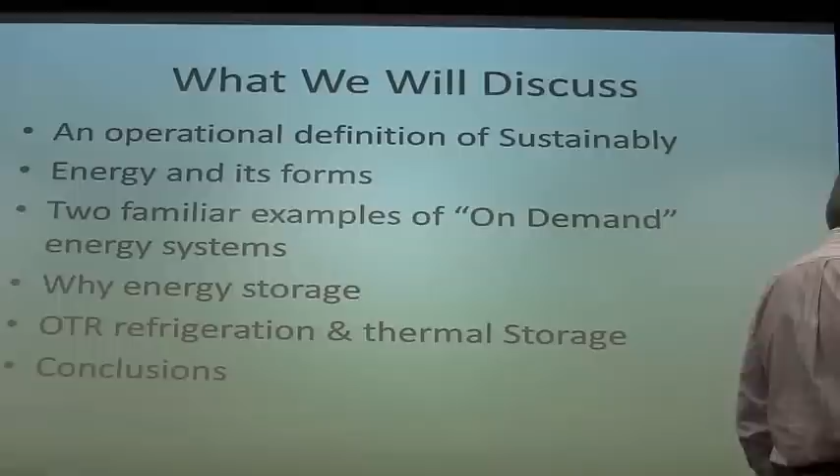I'm not going to go through all the design work, the model work, and all that stuff related to that. Then we'll conclude with a single slide. Is there some magic thing? It'd be nice to - oh there, I figured out how to work it.

Here's the definition of sustainability, and this is not unique to me. If you read books about sustainability, which I do, and I study and research sustainability, it is really the intersection of three things: energy, environment, and economics, represented here by three different colored circles - energy being red, economics green, and blue representing the environment.

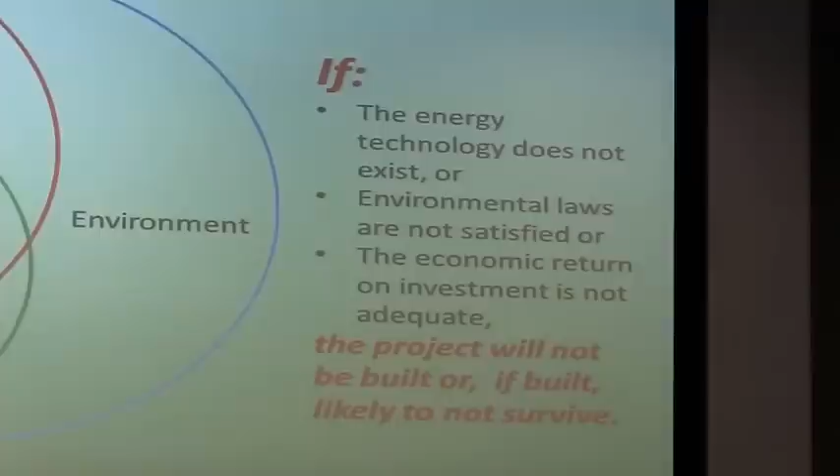Over here on the side, there are some ifs about this. It's sustainable if you have the energy technology - if you don't, you can't build it, so it's clearly not a sustainable solution. It's sustainable if the environmental laws are satisfied. If they're not satisfied, you're not going to be allowed to build it either, so you can't use that solution set. That's important to remember, because it's the laws, and they change along with the technology, that really control what's sustainable.

The last thing is the economics - if the economic return on investment is not adequate, you're not going to be able to attract investors to build the facility and your project. The reality is that if the energy constraints, environmental constraints, and economic constraints are not all met, it's not going to contribute anything to the supply of energy.

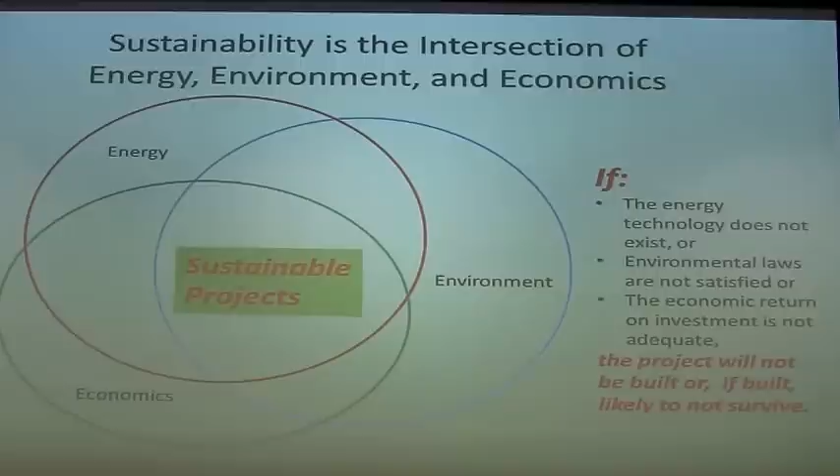So graphically, it's represented by a small subset, and if you're in the design business, you discover just how small that subset is - it's a pretty small subset of all those choices. What's entertaining about the energy business is that subset changes continuously, because the technology of energy, the environmental legal constraints, and the economic return on investment constraints change all the time. So you have to be careful when you do a startup company, to try to project what's going to happen to some of those issues during the startup time.

Alrighty, so this is probably the most boring slide here, but it's a necessary evil, otherwise we're going to have a hard time even discussing the subject with one another.

Energy is the ability of a body or a system to do work. And by that we mean, in essence, lift a weight or cause a weight to be lifted. So if you can convert it to work, you're in good shape.

Heat is the transfer of energy. What's interesting about energy is that this little controller I'm holding has energy stored in it. The only way you can tell there's energy in it is if you transfer energy from it to something else. There are two common ways of transferring that energy. There are lots of mechanisms, but at the end of the day, heat is the transfer of energy from one body to another by virtue of their temperature difference.

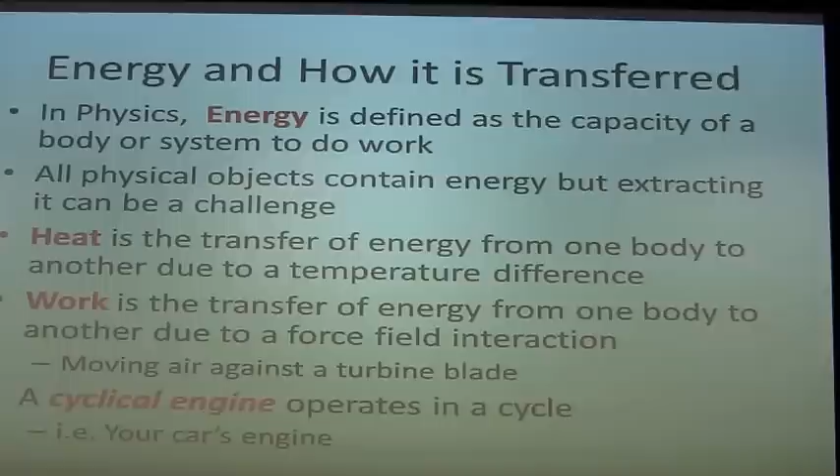Now, if I asked you, is it possible to transfer heat from a high temperature source to a low temperature source, you'd all tell me yes. Is it possible to transfer heat naturally from a low temperature source to a high temperature source? That does not occur naturally, right? We all know that. That, folks, is a very brief statement of the second law of thermodynamics, which, by the way, was discovered before the first law was.

Work is the transfer of energy from one body to another by virtue of a force field interaction. I've given you an example for that because the idea of a force field might be hard to accept. So if you've got moving air against a turbine blade, like on top of a windmill or a wind turbine, the air's interaction with the blade is a force field, a pressure field against the blade. It actually turns the blade. It's an imparting, a change of energy in the airstream, and it gets imparted to the turbine blade.

A cyclical engine is the last piece of this definition puzzle I have to cover with you, and so it operates in a cycle. An engine is a device that takes heat, converts it into work, and does so in a cycle, meaning the cycle repeats in time. A good example is your automotive engine, where the piston goes up and down, and depending on whether it's a diesel or a regular Otto cycle internal combustion engine, it might go up and down twice. But it repeats, it goes through a cycle, set point in time. Those four words are extremely important to you.

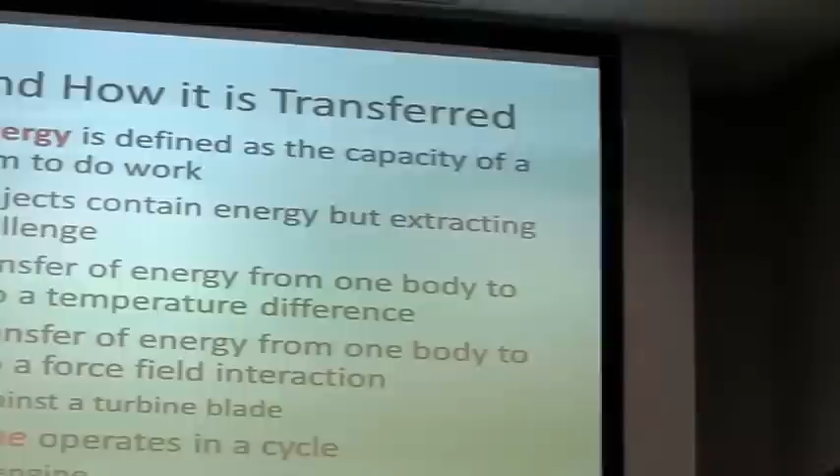All right, so let's see here. Now I had to define those in order to do this slide, so this is the second boring slide. All cyclical systems producing work, biological and man-made, share the following.

They all buy and consume energy. Somehow they get their food and their fuel. A tree is a cyclical engine, sometimes with a very long half-life, but nonetheless. Clearly, your automobile is a cyclical engine, and clearly when you run your automobile, you're the consumer. You buy the energy, you put it into it, and you get the work out of it.

They produce work when demanded by the system they serve. So when you demand more energy out of your car and you push down the gas pedal, you provide it more fuel and it produces more work, it goes faster. They also produce waste heat. That's what the radiator is on the front of your car, it gets rid of the waste heat. The system efficiency is defined as the work produced by the cyclical engine divided by what you paid for, e.g. the cost of the fuel coming into it.

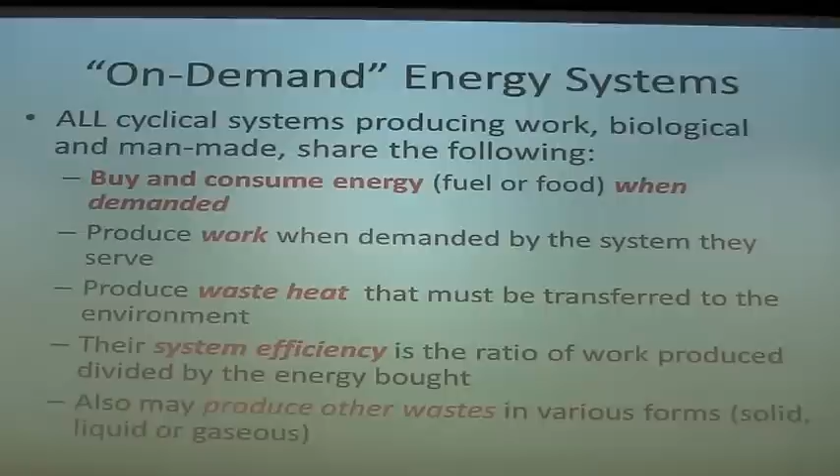They also produce other wastes: gaseous, liquid, and solid. They can produce one or more of those forms, or all of them. It's one of the interesting things about this, you'll notice it is impossible, according to the second law of thermodynamics, for all of the fuel you put in to be converted entirely to work. You always have to produce waste heat.

Now you say, that's interesting. So let's bring it a little closer to home. I want us to analyze what happens to Susie and Ahmed, two human beings. Is this close enough to home for us? Their bodies are cyclical chemical engines.

Our bodies are cyclical chemical engines, and we operate at 98.6 degrees Fahrenheit. The human body is a fascinating cyclical chemical engine with all sorts of interesting protection mechanisms built in, one of them being that we protect this 98.6 Fahrenheit a lot. The body's mechanisms for doing that are substantial.

Intake: every day we get up and eat our bowl of Cheerios or whatever, have lunch and dinner, or in some cases two meals, some places three, other people eat every other hour, who knows. We eat on demand, we eat when we are hungry. We demand that food be there, and if we get hungry enough, we become very demanding about it. So we count on a whole bunch of systems to provide us that food every day.

Even though food doesn't deliver much energy per buck, as you know from your cheat sheet, your body counts on that, and you are an on-demand energy system. We all do mechanical work — it took effort to walk up the stairs today, to carry your book bag or briefcase around. That's mechanical work, and we all do it every day.

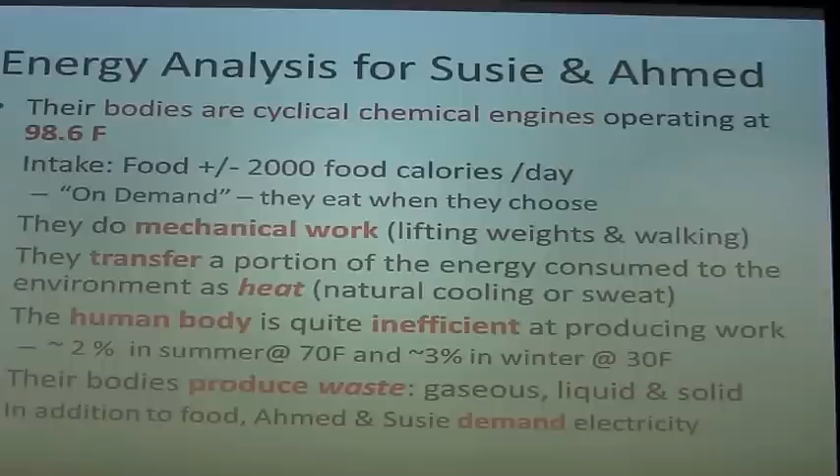In addition to food, however, we all demand electricity. How upset do we all get when there's a blackout? We've all experienced various and sundry kinds of blackouts, some minor, some not so minor.

Excuse me, I have a question. How do you calculate the 2% efficiency?

It's the thermodynamic Carnot temperature ratio — the high temperature, the body's temperature, minus the environmental temperature, divided by the body temperature in absolute temperature. So it's pretty low. And now that you've asked that question, that was a setup: the closer the body temperature is to the environmental temperature, the less work you can get out of the energy source.

So while the amount of solar energy falling on the face of the Earth is several hundred times — about 200 times — more than what humankind consumes, the problem is it's falling on the surface of the Earth at or close to the environmental temperature, so the amount of work you can get out of it is very small. So it was sort of a setup. Thanks, Narayan, for asking the question.

This is a photograph of a typical power plant. I randomly chose this from the web — you can find all sorts of photographs, but this one turns out to be pretty good from a lot of perspectives. First of all, when you see these, a lot of people driving down the road will see cooling towers, and that's what these are. They'll say, oh, it's a nuclear plant — well, not true. It's just a way of removing the waste heat from that power plant. That power plant can be a gas plant, a coal plant, a nuclear plant, or actually a solar thermal plant.

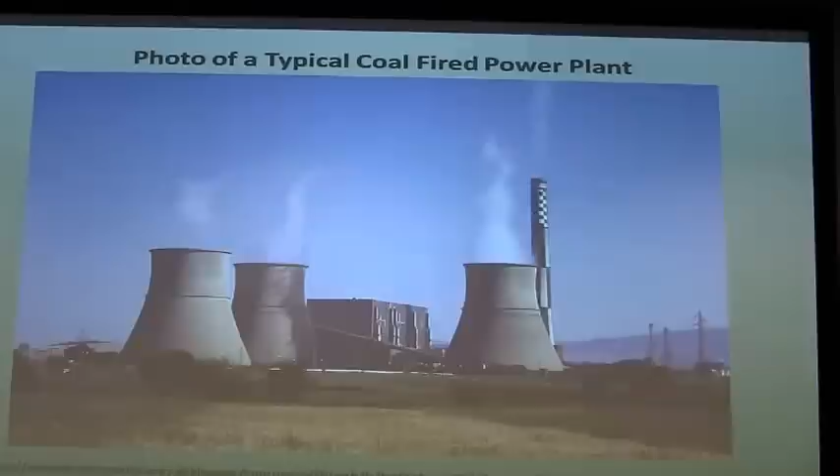You can tell it's a coal plant because of the transportation mechanism, a belt that connects the coal pile to the boiler, located in these big block boxes. The boxes are actually built around the boilers themselves—portions of them are the outside of the physical boiler. The coal is provided to those boilers through that mechanism. You can tell those are the boilers because these are the steam lines coming off of them. So if you know anything about power plants, you say, aha, that's a typical coal-fired power plant.

Now what I'm going to do is compare a power plant to Ahmed and Susie. A power plant is a cyclical chemical engine, much like Susie and Ahmed. The difference is they operate between 800 degrees Fahrenheit and 1500 Fahrenheit—they don't operate at 98.6. They operate a long way from the environmental temperature, long enough that seasonal variations in environmental temperature have little impact on their efficiency. It has a minor effect, but it's very small.

Their intake is a fuel, and the fuel can be, if it's a conventional power plant, gas, natural gas, coal, or nuclear, or coal and natural gas, because they're running two different cycles within the plant—that's called a combined cycle plant, which you'll see in a little bit.

They do mechanical work. The mechanical work they do is turn the shaft of the generator that generates the electricity that comes out of this wall. How it gets there, you're going to see that too in a second. But at the end of the day, they turn a mechanical shaft that turns the generator and makes the electricity.

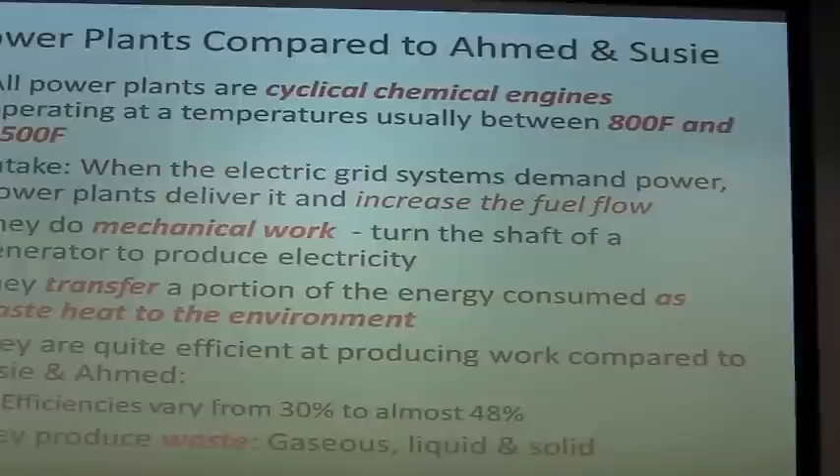Oops, I don't have to go up there. I had a quick question. Because of the high temperatures that they operate on, the weather patterns don't make a difference?

That's right. Whether the environmental temperature is 90 degrees Fahrenheit outside or 20 below, that would change the efficiency of the plant a little bit, because you can't freeze the water, so they have to keep it above like 50 degrees Fahrenheit as the low temperature. But the temperature at the bottom doesn't change much—it might go from 50 to 70, and that's about all. So in terms of changing efficiency, it really has a minor impact. What does control it is the high temperature, which is a materials problem. The only reason we can't make more efficient power plants is because of the material science involved in making particularly the turbines.

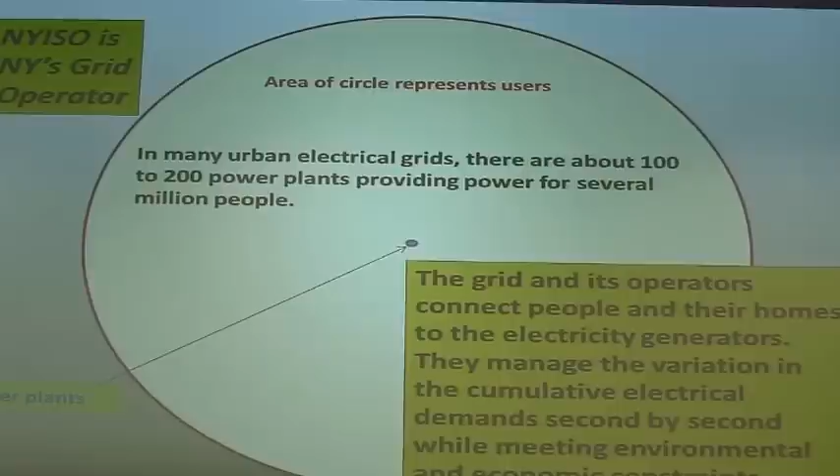Now I want to talk to you. We've got the power generator—we're at the aft end of the generator, and the plant is producing power. The power plant has to connect to you and me and our homes and computers, so it has to come out of that wall socket. In order to do that, there is a vast network of wires in the country that connect the small number of power plants to the millions of users.

The country is broken up into sections. Sometimes they're along state lines; other times some states have multiple grids within them. You're going to see both examples here. The first is New York State, which has one grid operator called NYISO. They are responsible for controlling and taking all the energy sources from the few power plants we have and distributing it to however many people live here—15 or 18 million people in New York. I don't know the current population.

So what I tried to do here is give you some sense of that. We have something like 100 to 200 power plants, and typically the area of this circle represents tens of millions of people—typically 10 to 20 million. So you're connecting a few hundred points with 20 million users, all of whom are Susie and Ahmed, all of whom have the right to turn the switch on or off, plug in their computer, start the hair dryer, turn on the washing machine, turn on the electric stove, whatever. They do that entirely at their will. All 15 million of those people in the grid are on-demand customers not controlled by anybody.

How complex is it? Now I've switched gears, I've gone from New York State to Texas with this chart. The reason I'm using Texas is that the strategies for reduction of CO2 production in the state have changed dramatically. In New York, what we're doing is shutting off the gas-powered plants in New York City, which are the lowest polluters by the way, and drawing on our assets in the nuclear plants, which have no CO2 production, and the St. Lawrence Seaway hydro plants, which are also no CO2.

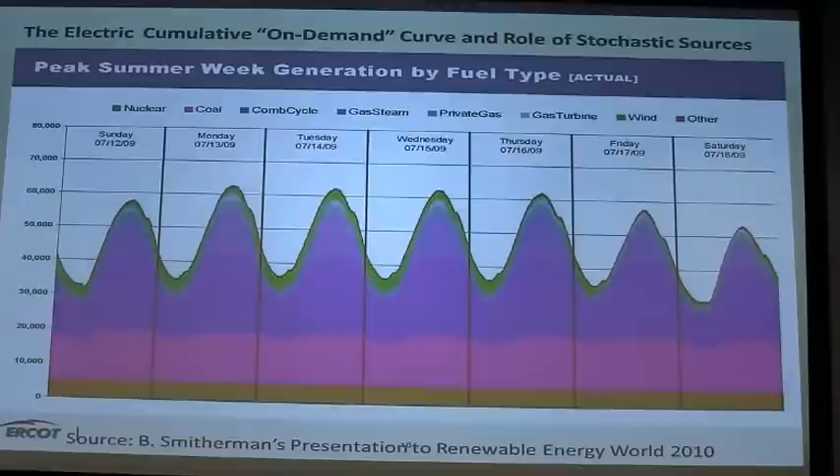Got it? But in order to do that, what do they have to have? A way of getting the power from the St. Lawrence Seaway and the nuke plants to New York City. So their power curve and our power curve look the same. This is what the diurnal power curve looks like in a typical grid. It starts out here, this line is midnight, so each line represents midnight between the two days, and you go from the early morning onward.

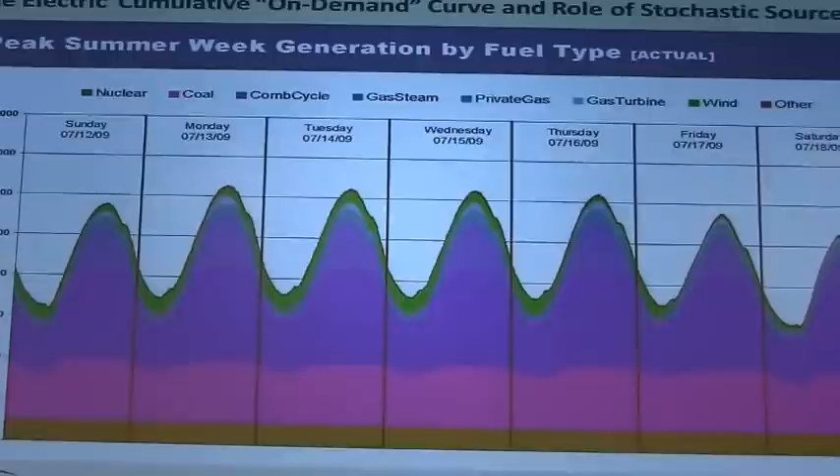Everybody starts getting up, they turn on their toasters and make breakfast, and they go about their day. They get to the office, they start up their plants, we start up the manufacturing plants that use electricity — all the things we do to make a living and to have our country be an economic success use electricity, which by the way is about a quarter of the total energy use of the country. But what's important about that statement is it's pure work.

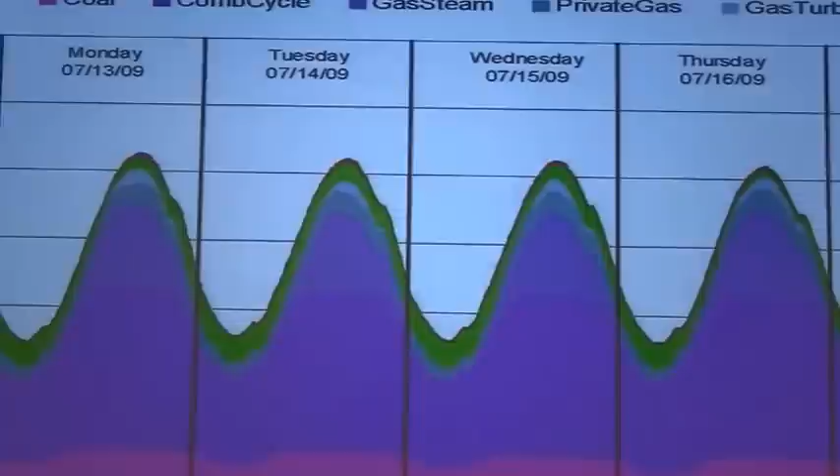Then it reaches a peak here at the end of the day, you know, you come home, and this peak is also caused by the air conditioning load, especially when you're in Texas. Well, actually even here. You'll notice this is actual data from July 12th, 2009. Then what happens is the air conditioning load goes down, the plants tend to shut down, at least some of them do. The companies close down and people come home and go to bed and go to sleep, and the cycle sort of repeats. So that's how the global cycle happens.

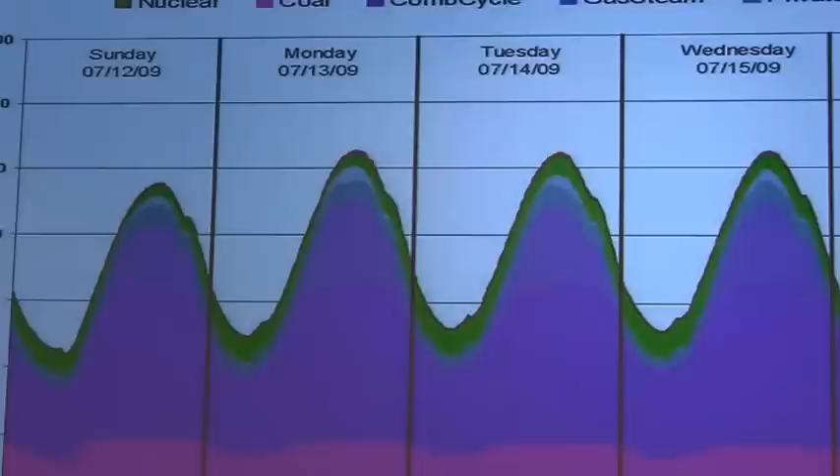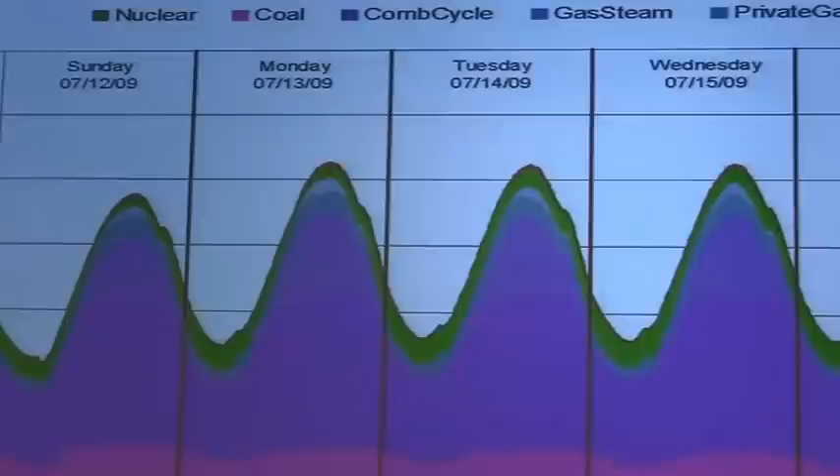Now, what's interesting about this slide is they have shown you how they get the power, what fuel sector the power came from. The fuel sectors covered are nuclear, coal, combined cycle - that's where you have a combined coal plant and a gas plant - gas steam plant, which is just a regular power plant run by gas, private gas and gas turbines. These two over here are actually gas turbine plants. And then wind and other.

The other in this particular case is solar photovoltaic and geothermal. Geothermal is different than the others because geothermal is an on-demand power plant, just like nuclear, coal, combined cycle, gas steam, private gas, and gas turbine are.

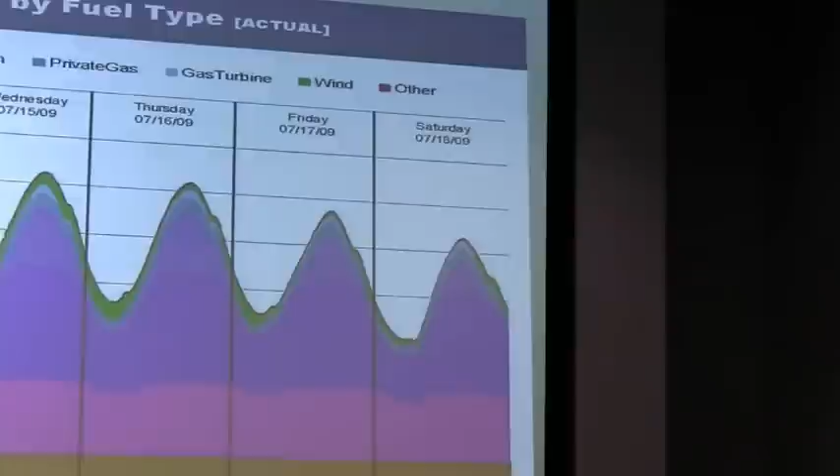The solar photovoltaic issue is that the energy storage required to meet the power demand from a stochastic source doesn't exist. We don't have good commercial scale energy storage. This graph shows you how much you need of that to do that, which is substantial.

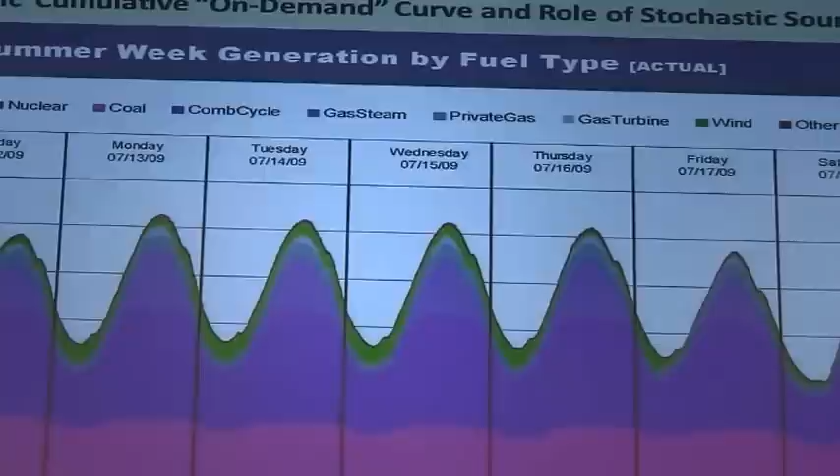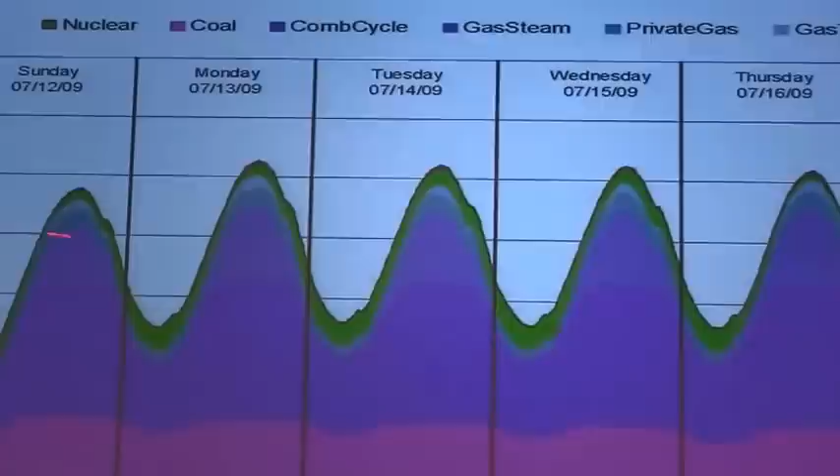On top of that, I'm going to say one other thing about this graph and then move on. If you're in the business of paying off the debt on the capital investment for the power plants - and it doesn't matter whether it's wind, solar PV, gas, coal, or nuclear - it is in your interest to have a nice level curve across here, so you have a predictable result. The last thing in the world you want is somebody messing around with how much power you can produce.

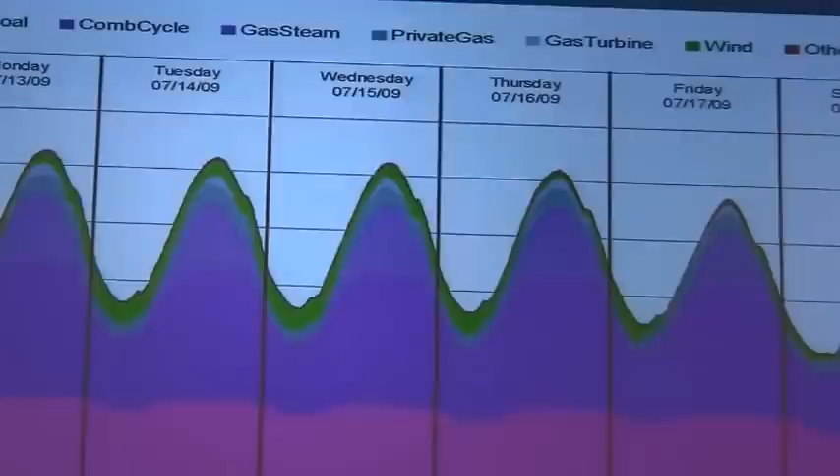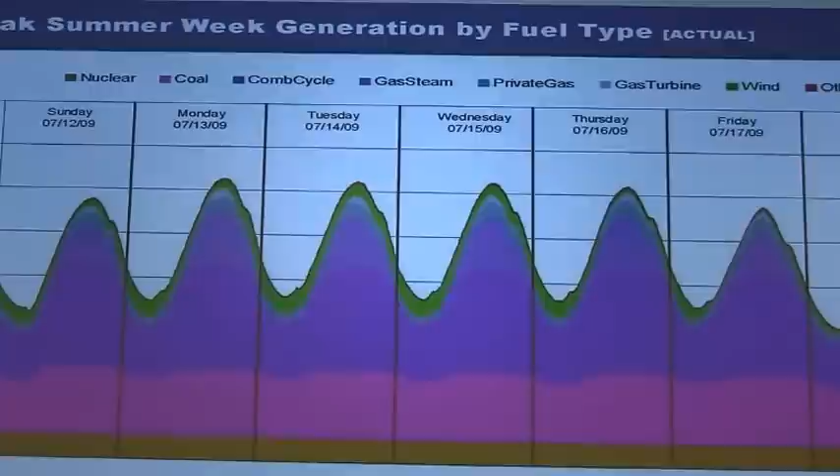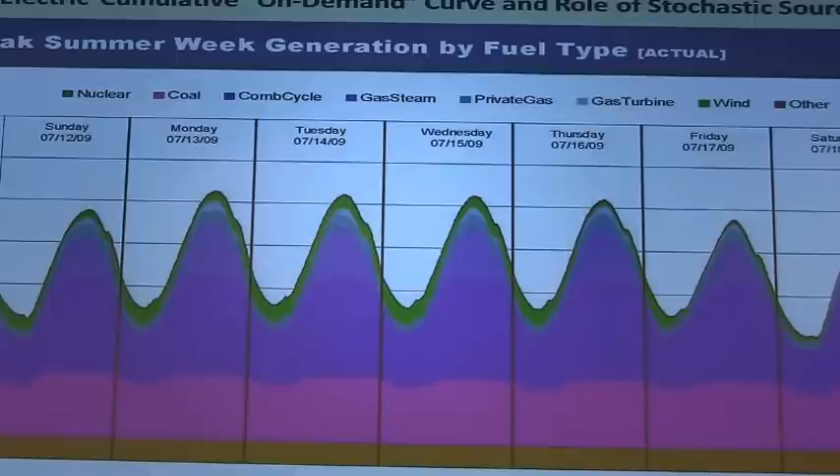In order for the stochastic sources - what they call in the business unreliable sources, I call them reliable, we just don't know how much and when - they are dipping in, and they count on the stochastic sources, the wind and solar PV. They must have all of these other sources in order to make the pieces fit.

If I buy a 3 megawatt wind turbine mounted on top of a 120 meter pole and stick it up there - that's the size of a bus, by the way, of a regular bus you see driving down the road, about 100 meters off the ground or so - the bottom line is that's the capacity of that facility.

So that's what capacity means, and it's what you pay for with your capital money. So when you see the word capacity, it means this is how much we have in installed capacity, meaning this is how much energy we can generate. The generation, though, is when I sell the electricity and it goes down the line, I get a cash flow fed back into my facility for doing that, and I sell it by the amount of energy I produce, which is kilowatt hours. Well, that's not the only parameter, but that's good enough for this discussion.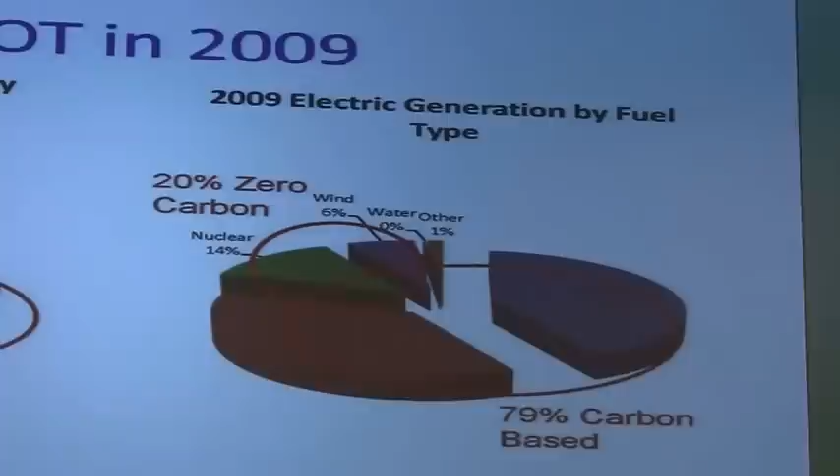So at the end of the day here, the constraints that ERCOT manages - in this case, ERCOT is the Texas Reliability Council, it stands for the Electric Reliability Council of Texas - they, just like New York ISO, are responsible for managing what fraction of the time we get energy out of natural gas, what fraction of the time we get out of coal, out of nuclear, and out of wind. We have relatively little wind in spite of the fact that we have several wind farms around here.

In terms of the total grid operation, it's not even close to Texas. Texas has a very different strategy. Their strategy is to develop the non-carbon, zero-carbon resources. That's their strategy for meeting the EPA's requirements of reducing CO2 production. So they are investing enormously in wind and solar PV.

So this shows you, for example, if you look at nuclear, that they've got 6% of the generation capacity, but they are selling 14% of the revenue stream. So they're getting 14% of the revenue stream for only 6% of the capacity that they have installed.

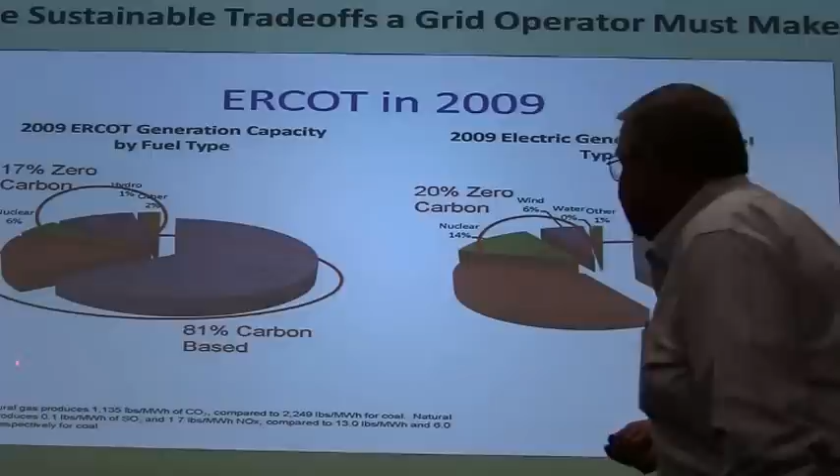Coal has 16% of the installed capacity, and they're selling 37%, in spite of the fact that they have a reduction of CO2. Why? Because they're worried about the price that the customer pays. If you look at New York's kilowatt hour rate versus Texas's electric rate, Texas is about 70% of New York's. So they're much cheaper. They control what fraction of the power comes from coal and what fraction comes from natural gas, all to reduce the amount of carbon they're producing. That's only one of their constraints.

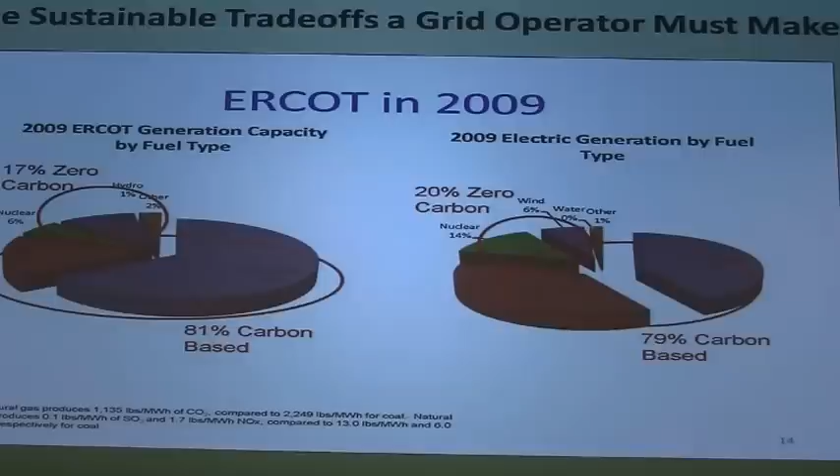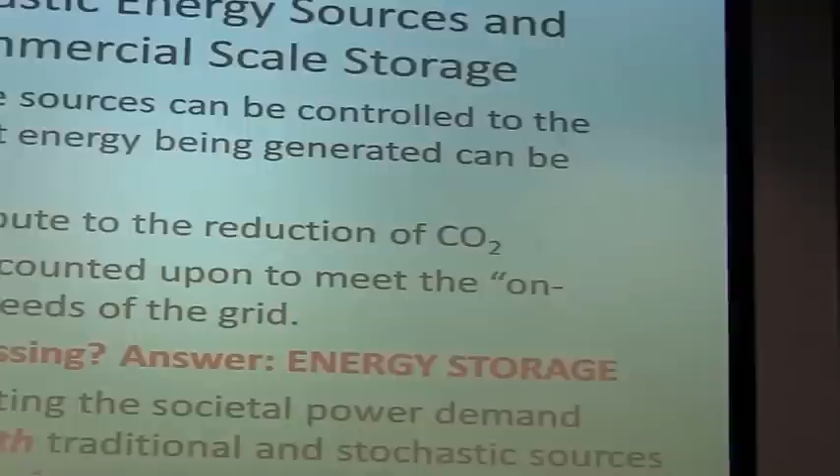All right, so stochastic energy sources and commercial scale storage. Renewable sources really can't be controlled, except you can dump the power. A wind turbine has a cutoff velocity and a startup velocity. If the wind is below a certain velocity, it won't run because it's not worth running the turbine. If it's above a certain velocity, you feather the blades and turn it into the wind so you won't ruin the turbine. In between those two ranges, you'll run the turbine.

But if the grid doesn't need the electricity, they'll call you up and say, shut off your turbines, in which case you feather them and lock them. That's the degree of control that exists for a wind turbine, in the global sense. All of the stochastic sources can contribute to reducing CO2, which is an important constraint. They can also contribute to the electrical demand, it's just that they cannot be counted on to meet the on-demand needs of the grid. Not at the present time. What's missing? The answer is energy storage.

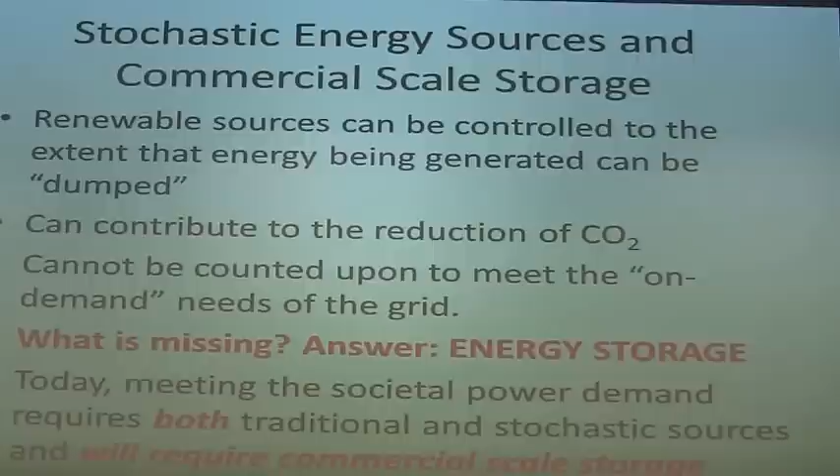Today, the societal power demand requires both the traditional and the stochastic sources, and we absolutely have to find a better way of solving the commercial scale storage problem. That's how I got into this research project to begin with, because we were working on energy storage issues. So here is one solution some of you may have seen.

It is a commercial scale compressed air storage for offshore wind farms. What it is, is a great big huge balloon, fastened to the ocean floor, typically at something like 300 or 400 feet, maybe 500 feet, so it will take several atmospheres of air pressure.

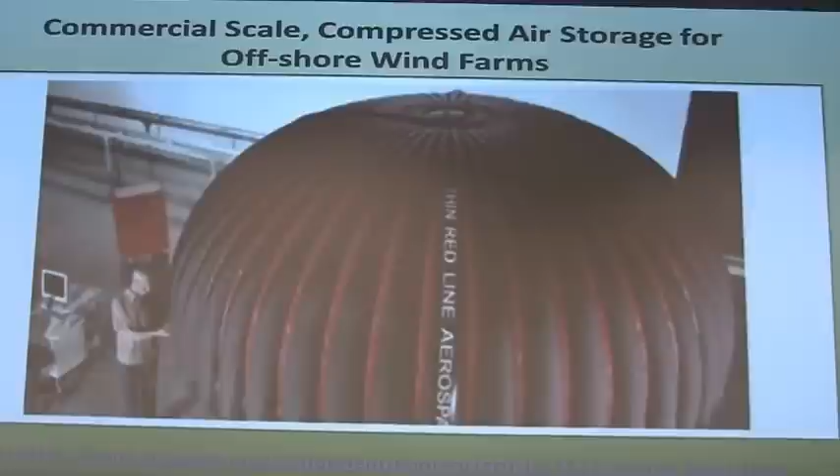The way it works is pretty simple. They fire up their wind turbines, which, if placed appropriately offshore, tend to blow most of the time. They generate electricity and run great big huge air compressors, and those compressors blow up the balloons. They store energy on the ocean floor, using the weight of the water above to maintain that pressure. So they now have stored mechanical, or stored air, there. Then when they need to provide electricity to the grid, they run the air through an air turbine, which turns the generator, which they sell into the grid on demand.

The efficiency of this system, I think the best they've done so far is 85%, which is pretty good, so they're taking a 15% penalty for storing the energy. That's way better than batteries. The problem with batteries is you can't really build one that stores it at that scale. Yes, there are other storage mechanisms — I'm not going to talk about hydrogen, but that's one of them, as long as you're willing to live with hydrogen.

How am I doing? Okay, three more slides, all right. This is how the whole thing started.

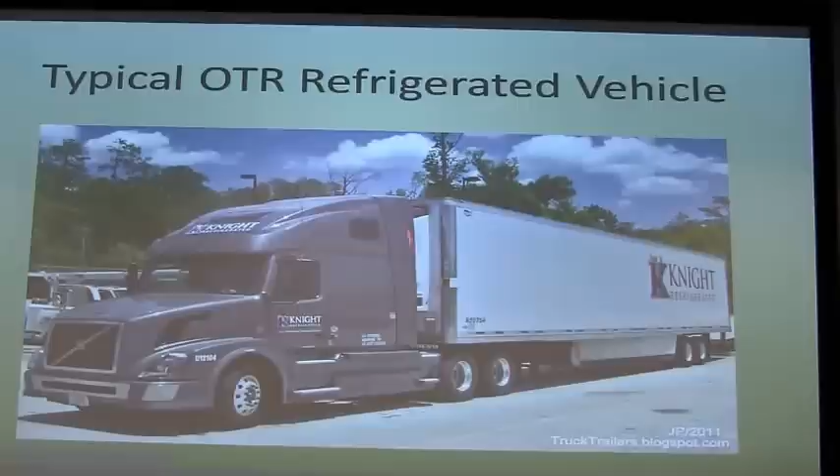A typical reefer has a weight of 3,000 pounds. That's how much the refrigeration unit on the front of the trailer truck weighs. It consists, at minimum, of a 100 horsepower diesel engine, a 4-cylinder refrigeration cycle, all the controls, and the heat exchanging equipment required to run the unit, plus a connection into the trailer box to condition the space, usually kept between 0 and 45 degrees Fahrenheit depending on the product load. So they weigh 3,000 pounds.

The constraints for building the storage system were that we have to maintain the box at the same conditions the reefer maintains for 24 hours at 0 degrees Fahrenheit, when the air outside is at 95 degrees Fahrenheit and 95% relative humidity. That's just one of the constraints. So if you're going to build a thermal storage system to replace the reefer, it has to weigh less than the 3,000 pounds the reefer weighs.

It's got to do the same thing as the reefer for at least 24 hours, and it's got to be swappable—depleted storage units exchanged for charged units in 30 minutes. That was one of the initial conditions, because the idea is you can build storage stations on the interstate where, if you're running low, you pull in, replace your storage unit, fill with diesel, eat lunch, and go.

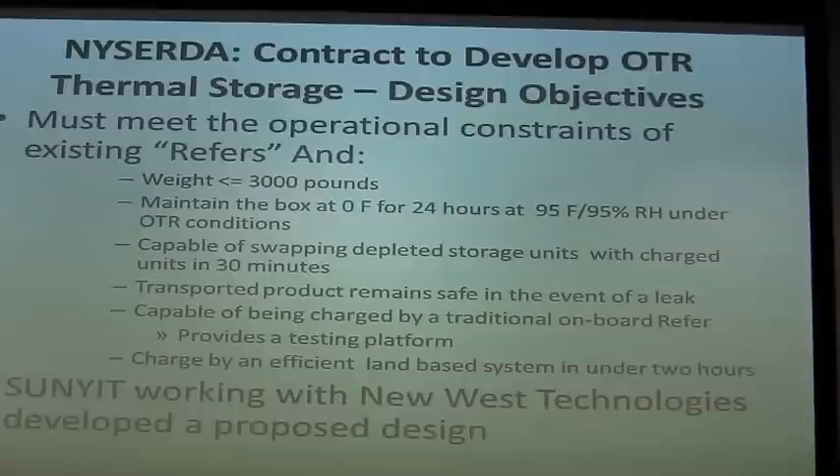The transported product has to remain safe in the event of a leak. It's got to be capable of being charged by the traditional onboard reefer, and this constraint came about because the strategy is that nobody is going to take a refrigerated truck with $400,000 or $500,000 worth of product and put a thermal storage unit on it without knowing for sure it's going to work. So they said you've got to go through substantial proof-of-principle testing to make this work.

The charge really changes things because now you can charge these units with an efficient dual-stage refrigeration cycle versus the single-stage refrigeration used in a reefer, and the efficiency gain is substantial—a 3-fold increase. At the end of the day, they wanted to do it under 2 hours. That gives you a really interesting heat transfer problem. In fact, the set of constraints here is entertaining.

Ryan back there is working with or for New West on this project, so he's somewhat familiar with it. We're working with New West Technologies to develop a proposed design. I got involved because one of our former students called me up and said, hey, this looks like an interesting project, but I don't know how to do all of it—will you work with us? So that's how I got involved.

NYSERDA's board is run by a group of electrical executives. They want to fill those valleys you saw on the power curve, and they see this as an opportunity to charge the thermal storage units off-peak, when they can get a better return on their investment. So they have a purposeful interest in doing that.

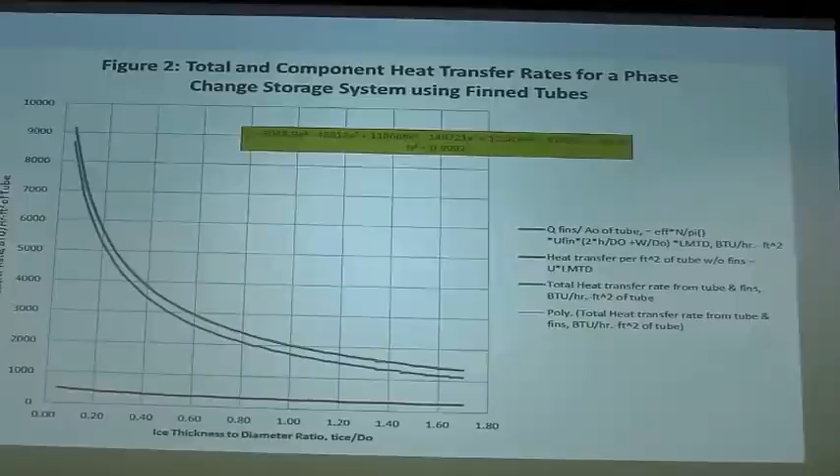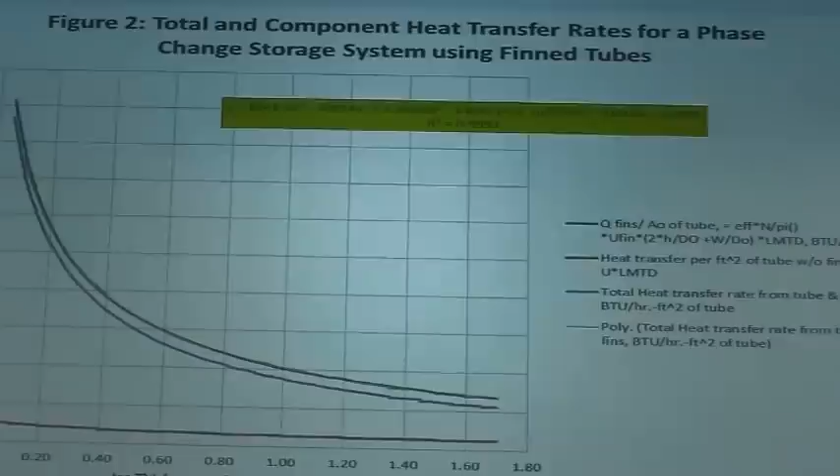I'm going to show you this one curve. Once you get a design for a thermal storage unit—and this is the simplest one we could conceive of—it consists basically of a set of tubes with fins to enhance heat transfer, combined with a phase change material. In this case, it's ethylene glycol and water, so you can control the temperature at which the mixture freezes, varying it so that units can freeze at different temperature levels. That gives all sorts of advantages, but also some really interesting technical challenges.

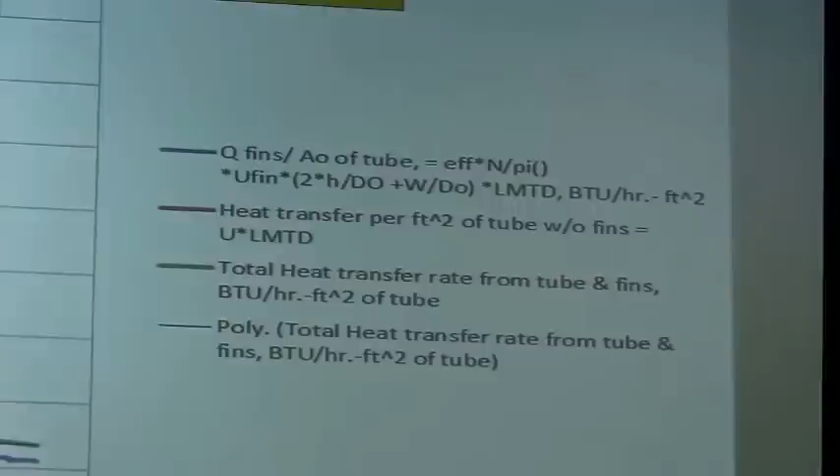There's about 25 or 30 parameters in the model. I'm not going to put you all to sleep going through the detailed analysis, but at the end of the day, if you put fins on the tubes correctly, you can get a substantially enhanced heat transfer rate versus a plain tube. The amount of energy stored in the device is the area under this curve, and that's why the curve-fit data are given—so you can calculate how much energy this unit stores.

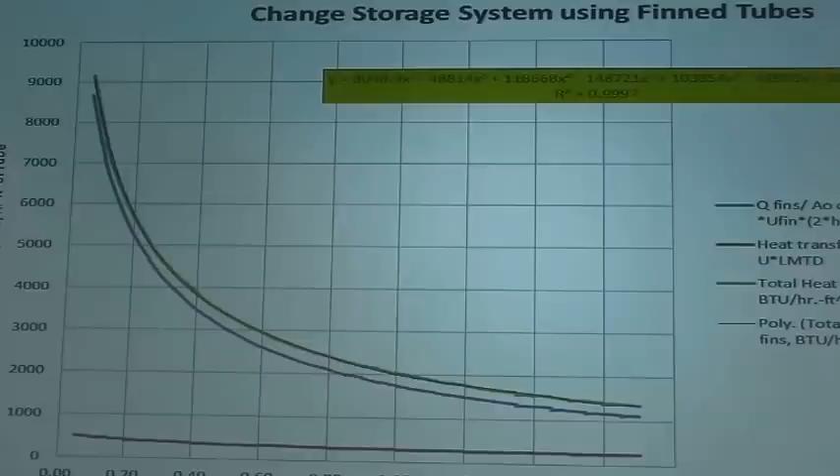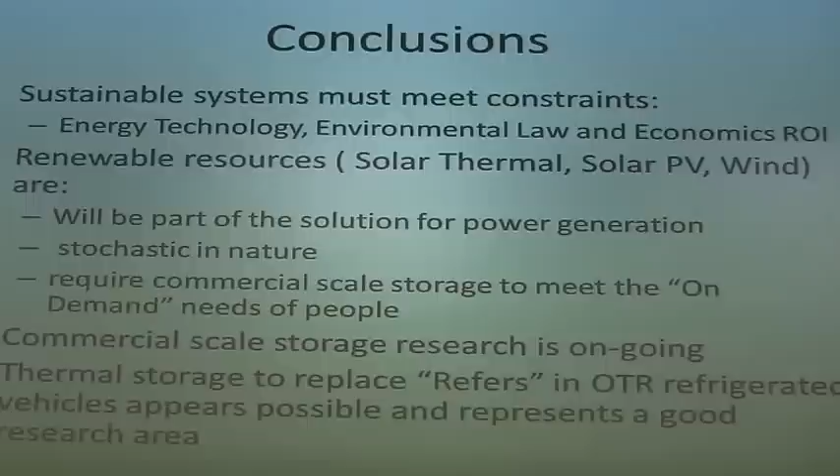Just going back on what you were talking about before, how the New York State grid system has to monitor how much electricity is sent back and forth from point A to point B. I know during the summer living upstate New York, we sometimes get an alert saying lower your energy consumption. Because SUNY gets that all the time. SUNY IT? Yeah, right. We're on a load shedding rate structure.

Okay, my question was, if demand that we put on the system can't be... what's the word I'm looking for... managed, how are we asked to cut back to give forward?

The electric companies are managing loads two ways. One of them is with their major customers like SUNY IT. If you're a big company, that's one of the things you do: you agree to manage load by shutting off your major demand for a portion of the day, because it gives you reduced electrical rates.

The other way is coming to your local friendly consumer, and they're called smart meters. For example, in ERCOT, they've already installed over 13 million smart meters. They're actually controlling how much electricity your major appliances use, and they'll shut off your air conditioner for 5 minutes and then turn it back on. They'll shut off your water heaters if you have electric water heaters, and shut off your major electrical demands with a smart meter, then turn it back on.